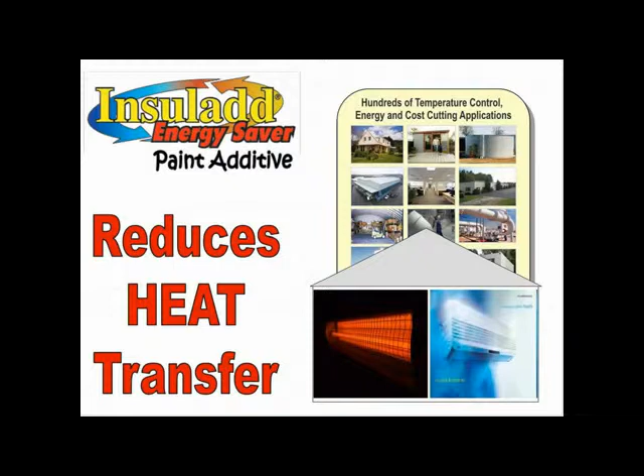Using Insuladd means you can stop running costly energy-guzzling heating and cooling devices. Think of how much money you could soon be saving.

NASA's technology transfer program has resulted in numerous breakthrough products on the commercial level. Insuladd is one such product, as outlined on the NASA website. The technology behind it is viewed as a progressive step toward creating more energy-efficient buildings.

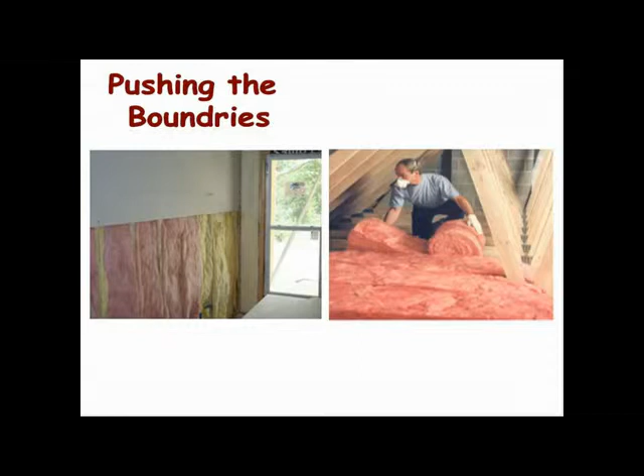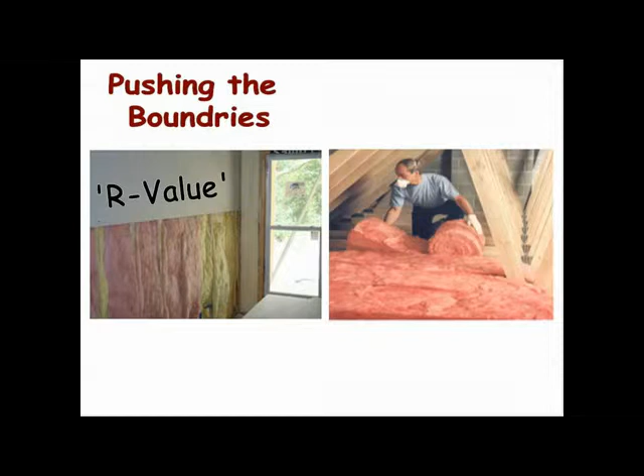Progress often challenges our thinking. We're all familiar with bulk insulation because for a long time it was the primary way to control heat loss and heat gain in our building structures. Popular opinion states the higher the R value assigned to this thick, fluffy material, the better insulated we are against heat transfer. In truth, this is only partially correct.

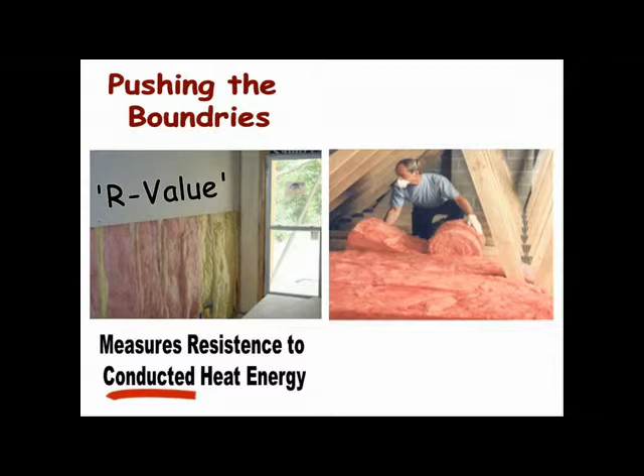An R value relates to a product's capacity to resist only one of the three forms of heat energy transfer. It's really important to know this about fluffy bulk insulating products because up to 93% of heat gain in buildings is heat energy transferring in radiation mode.

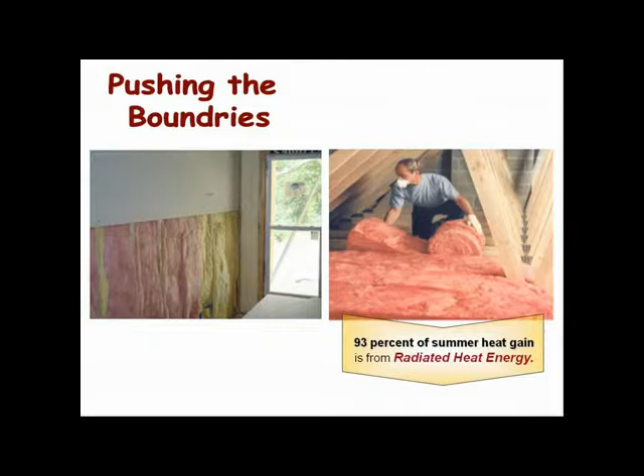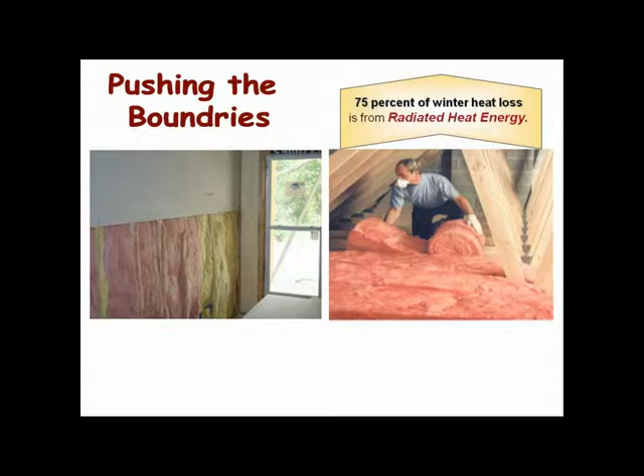In hot weather, radiated heat energy will transfer straight through regular fiberglass insulation. In cold weather, the effect is reversed, with approximately 75% of interior heat energy radiating through our regular fiberglass insulation. So, in terms of conserving energy and saving money, the focus logically needs to be on minimizing radiating heat energy.

Even for buildings with existing insulation, a product that stops radiated heat transfer will play a significant role in reducing power bills. Before proceeding, listen to this additional information about heat energy.

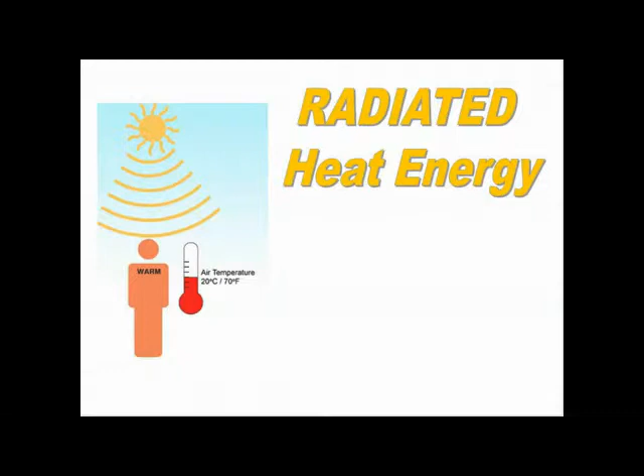Almost every object collects and gives off radiant heat energy in the form of waves. We all feel the warming effect of radiated heat when we stand in sunshine. But have you ever noticed that as a cloud blocks the sun, you immediately feel colder? It's important to note that in these cases, the temperature of the air remains the same and has in no way dropped as a result of the cloud.

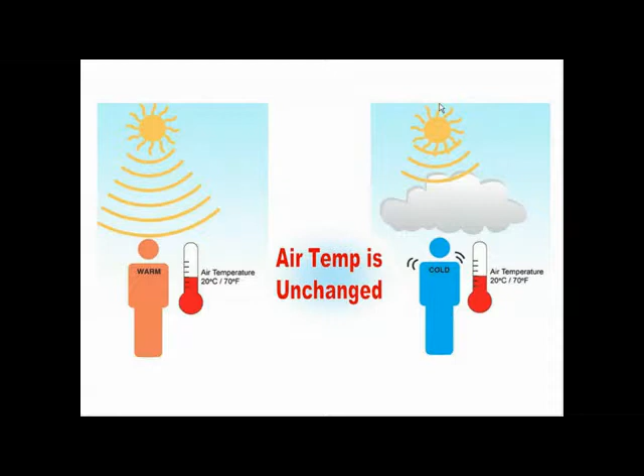So how then do we explain the cold chill our body is feeling? It's because radiant heat energy is absorbed at molecular level by our skin, and when no radiated heat energy is penetrating the skin, our brain registers cold.

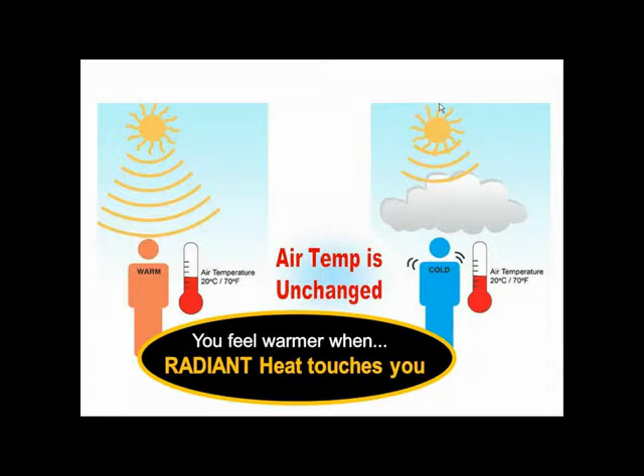This insight is really important in understanding the role played by Insuladd, a product that can regulate human comfort while simultaneously acting as an energy and money saver.

Made up of millions of hollow core ceramic microspheres, Insuladd comes in the form of a superfine white powder that is easily mixed into any type or color of paint. The real innovation, however, is the unique coating layer applied to the microscopic balls, which gives each microsphere the ability to deflect and dissipate radiated heat energy.

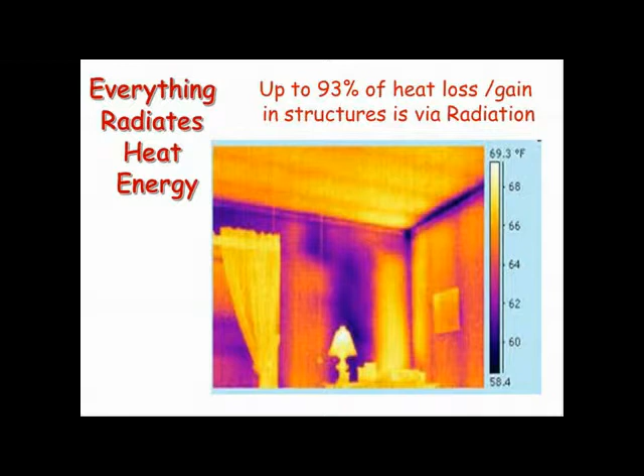This same process occurs with the tiles used by NASA. Almost every object radiates waves of heat energy into the surrounding air. So let's see how this heat energy gets reflected when it reaches a wall, or ceiling, or roof where Insuladd microspheres have been added to the paint.

Insuladd microspheres resemble lots of billiard balls on a table. Some of the heat energy molecules radiating will miss the microspheres and pass through the wall and insulation as usual. But much of the heat energy collides with the microspheres and ricochets back to where it originated.

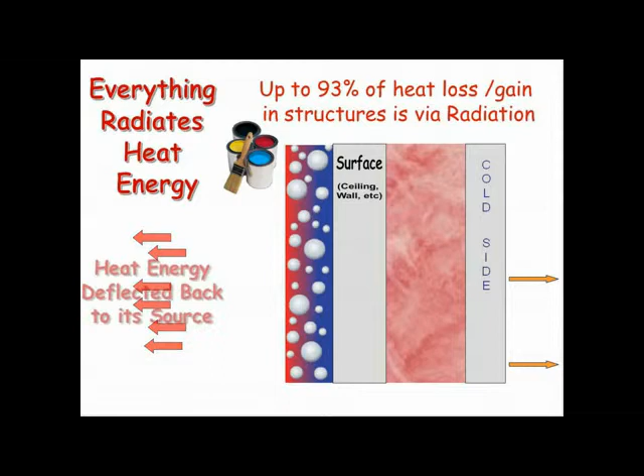In winter, for example, when the heat energy molecules radiate back in the interior and come into contact with human skin, the occupants get a warm sensation similar to standing in the direct sunlight.

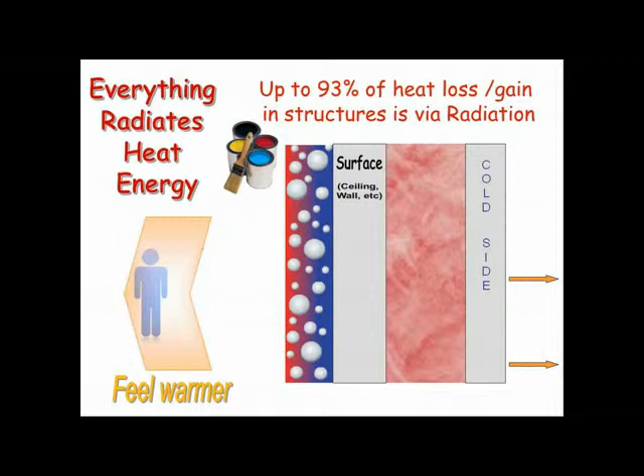Stopping people from getting cold is now as simple as adding Insuladd to their interior paint. It causes radiating heat energy to bounce back into the interior and make the occupants feel warmer. Feeling warmer means cutting back on heating bills and putting more money back into the consumer's pocket. Insuladd is the eco-friendly way to maintain desirable human comfort levels and lower power bills.

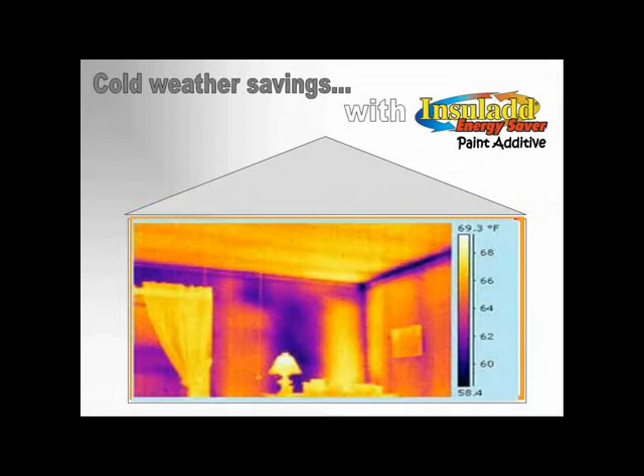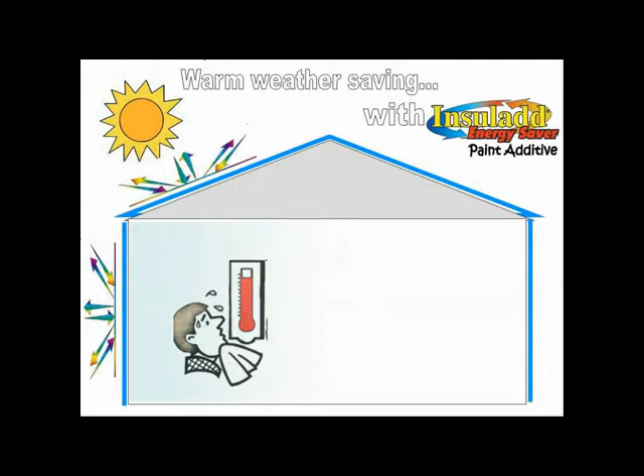Adding Insuladd to exterior paint reduces heat gain. The microspheres in Insuladd bounce the radiated heat energy back into the atmosphere, which allows indoor occupants to feel cooler. With less heat energy penetrating through the building, the use of cooling devices and the money needed to power them can be reduced.

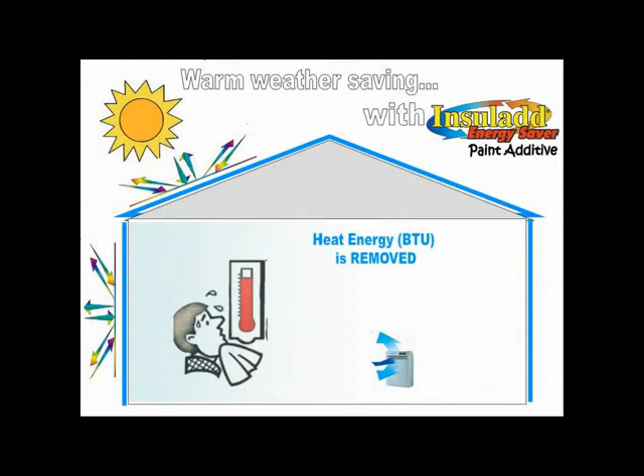Insuladd may be new to many, but its 7-year track record speaks volumes. Originally formulated for use in paint in conjunction with NASA, Insuladd has since been subjected to numerous independent testing to validate its energy-saving capabilities. Reports from independent research facilities like Geosciences Limited, for example, highlight the value added by Insuladd to building surfaces.

After testing Insuladd, the Chinese National Center for Building Testing concluded that on the structures they tested in cold environments, the energy-saving results exceeded 12%. In the hot region structures, the energy savings reported from adding Insuladd were found to exceed 20%.

The applications for minimizing heat transfer across the commercial sector are numerous, and with its proven performance, companies worldwide are making use of this revolutionary technology.

As global energy-generating resources get depleted, progressive thinkers are calling for the inclusion of Insuladd's energy-saving additive to government, commercial, and residential structures on an increasing scale. With the cost of power spiraling out of control, ways to minimize the spending burden to consumers must be addressed.

Insuladd is a simple and cost-efficient energy-saving solution for the home and the workplace. Because Insuladd works passively at reducing costs associated with heating and cooling, even a small daily savings can become significant over time.

And here is the best reason to use Insuladd when you next paint. From a financial perspective, the savings you can generate are more than sufficient to cover the cost of the Insuladd, the cost of the paint, and even the application costs by a contractor.